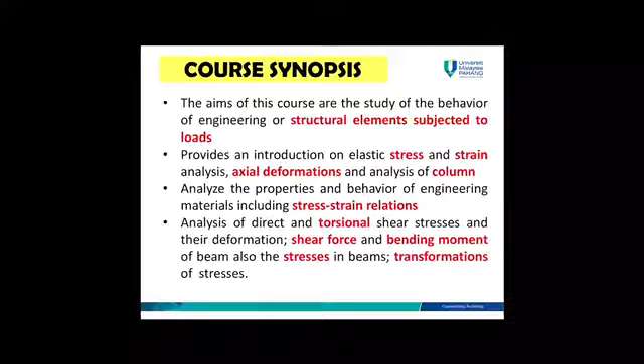There are 4 course outcomes of this subject. First is to apply the fundamental concept of stress and strain to axial load and transformation in plane. Second is analyze the shear moment diagram as well as bending and shear stresses in beams. Determine the stresses, deformation and twist angle of a torsional bar. Determine the magnitude of a critical load of a buckling column.

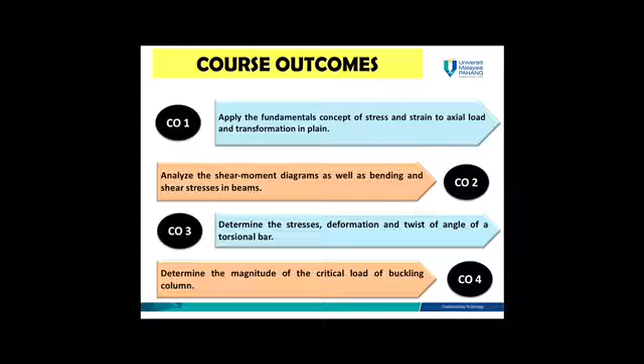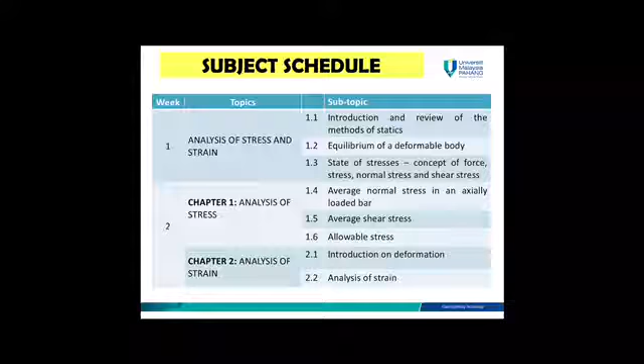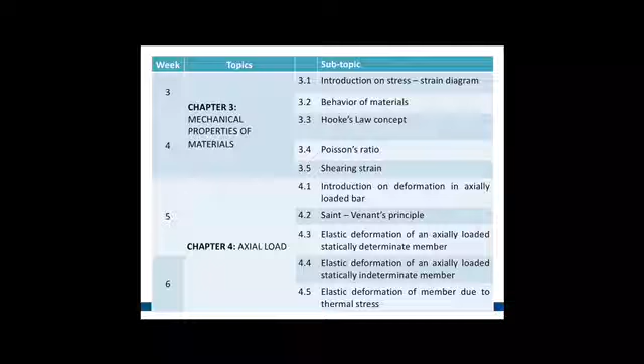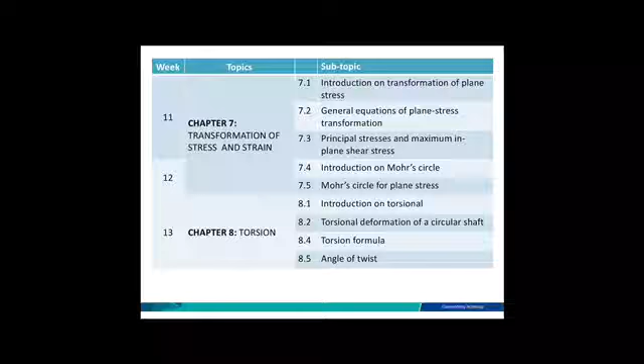This is the subject schedule. There are 9 chapters for mechanics of materials. First chapter is analysis of stress. Second is analysis of strain. Third chapter is mechanical properties of materials. Chapter 4 is axial load. Chapter 5 is analysis of beams for bending. Chapter 6 shearing stress in beam. Chapter 7 transformation of stress and strain. Chapter 8 torsion. Chapter 9, the last topic, will be analysis of column.

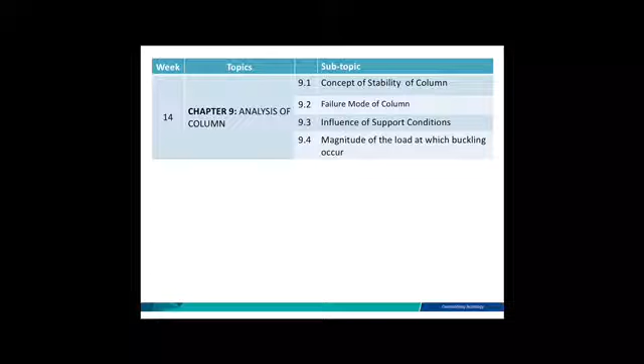Let's begin with chapter 1 of mechanics of material. Chapter 1 is analysis of stress. So why do we need to analyze the stress? We need to analyze the stress because what happens if you are in stress? If you are in stress, then you will depress. There are consequences when you are in stress.

Same goes for the structure. When the structures are in stress, they tend to deform. That's why chapter 1 is very important, because you need to determine the stress of the structure in order for the building or the structure to remain sustained without any collapse, without any deformation.

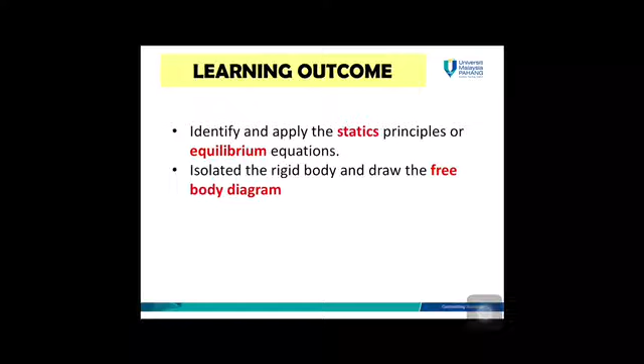As for introduction, mechanics of material is a study of the relationship between the external loads on a body and the intensity of the internal loads within the body. This subject also involves the deformations and stability of the body when subjected to external forces. Deformation means the action or process of changing in shape or distorting, especially through the application of pressure. As mentioned, mechanics of material studies the behavior of the material or structure when subjected to a load.

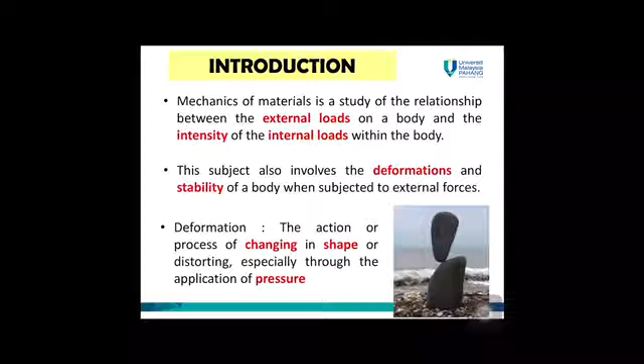So when the load is applied to the structure excessively, the structure will deform. Deformation here means changing its shape and dimension due to the applied load. All the structures you design need to be stable and in equilibrium condition. This is an example of what happens when stability or equilibrium is not taken into account.

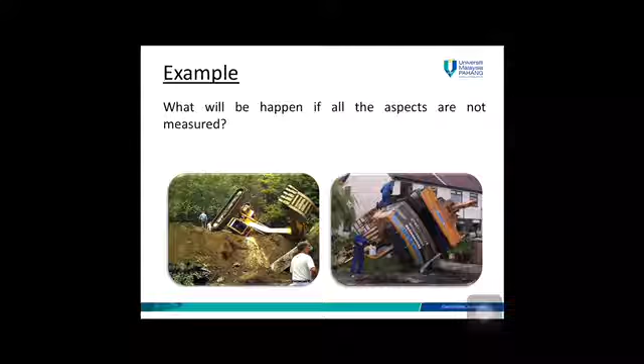The structure will collapse. As a civil engineer, one day you may design a building, so all aspects of equilibrium and stability need to be measured in your design in order to avoid a collapse.

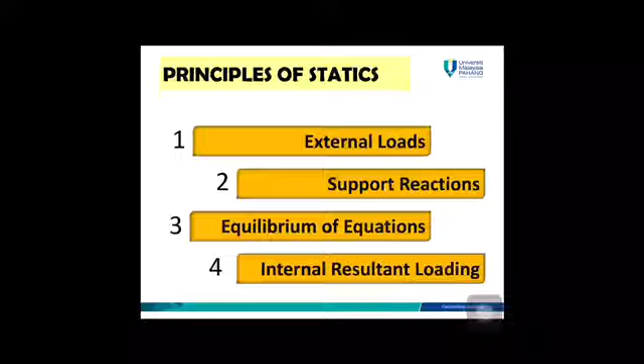First, we take a look at the statics principles. There are 4 static principles that all structures need to comply with. First is external load. Second is support reactions. Third is equilibrium equations. And the last one is the internal resultant loading.

So we take a look at the external forces first. What is the external force? The external force is the force. For example, this is your structure, and this is an element in the structure.

This element is subjected to all the forces, for example, surface forces. By definition, surface force is caused by direct contact with another body's surface. So this is your structure, and this is a force subjected from another element. The body force is basically the gravity of the element itself.

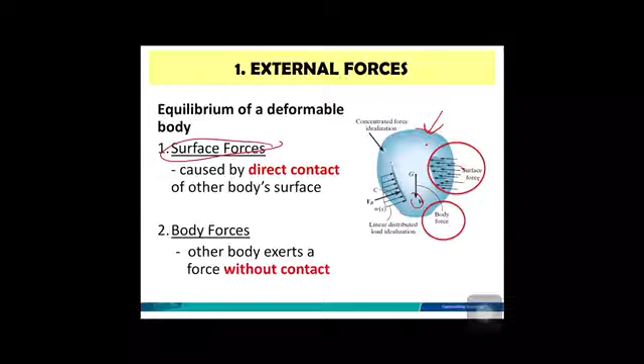So we take a look at the definition. Surface forces are usually caused by the direct contact of one body with the surface of another, the contact between two elements. In all cases, these forces are distributed over the area of contact between bodies.

How about concentrated forces? Concentrated forces act at a point, any load over a relatively small area compared with the size of the loaded member. A linear distribution load produces a resultant force having a magnitude equal to the area under the load diagram and having a location that passes through the centroid or geometric center of this area.

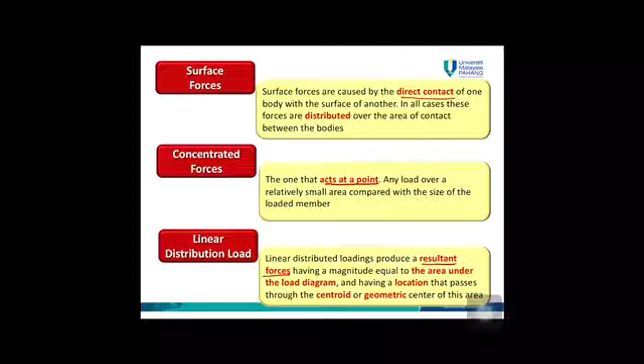So you already learned these types of loads in engineering mechanics. This type of load we will apply to the structure, and we will analyze whether the structure can sustain all this load or not. For example, you have a structure, a beam. There are different types of load: you have a surface load, a point load, and also a linear distributed load. What does it mean by all this load? In the next chapter, you will become familiar with all these types of load.

First, you have a UDL, uniform distributed load. This is a UDL, uniform distributed load. It is distributed equally on the surface of the structure. We call it a UDL.

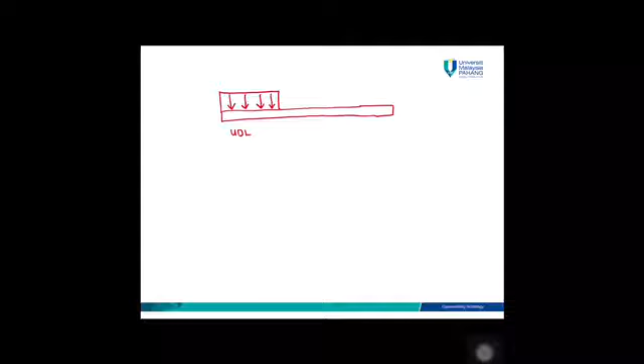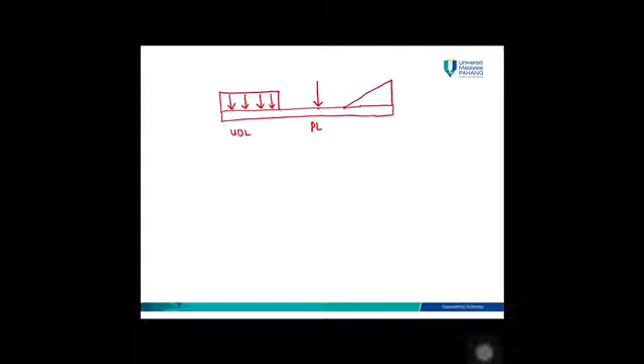Concentrated load, usually we call it a point load. Point load is only at a point, only at this point. Linear distributed load has a different magnitude, usually in a triangle or trapezoid shape. The magnitude varies from 0 to the maximum magnitude. This one we call a linear distributed load.

Linear distributed load has a different magnitude. I repeat again: here is 0, here is the maximum magnitude. This is the type of load that we will analyze later.

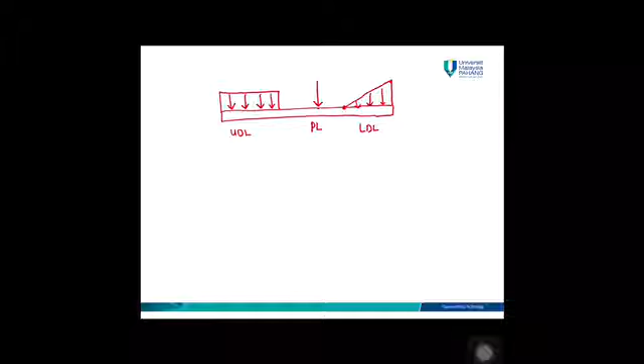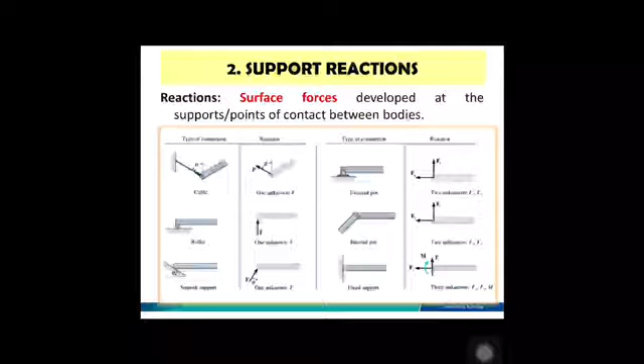And then we go to the second principle, which is support reactions. Usually we have 3 common supports used in mechanics of material: roller, pin, and fixed. It will be located anywhere along the structure elements, depending on the design and the application of the structure.

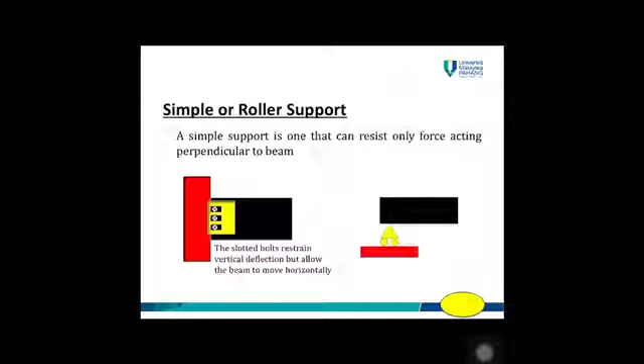For example, a roller: this is your beam, and this one will be your support. For a roller, they only have one support reaction, depending on the position of that support. So this one I name as AY because it is in the Y direction, and I assume this is point A. You can also have different names, like RA or HA, depending on the axis.

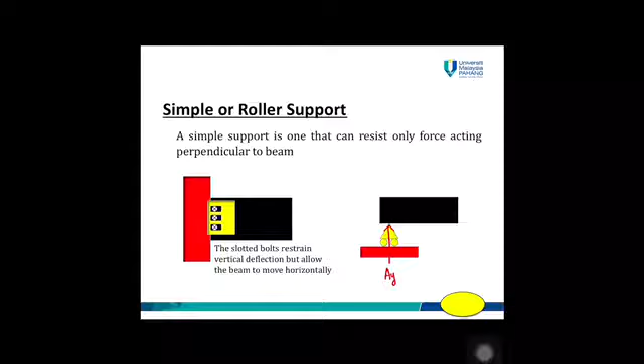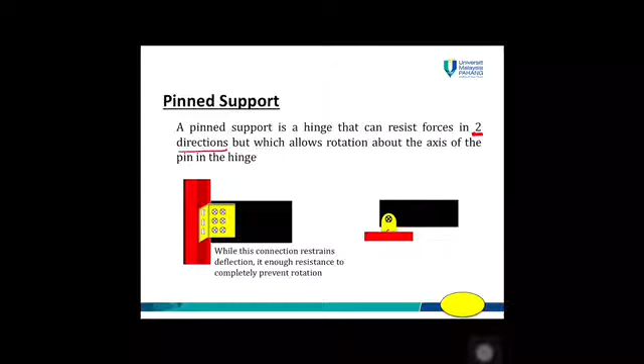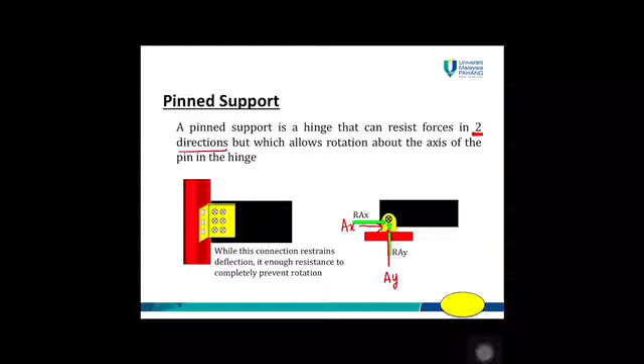Second support is a pin support. Pin support has 2 support reactions, in the Y axis and also the X axis. I name it AX and AY. You can also name it R, meaning reactions. The last one is a fixed support.

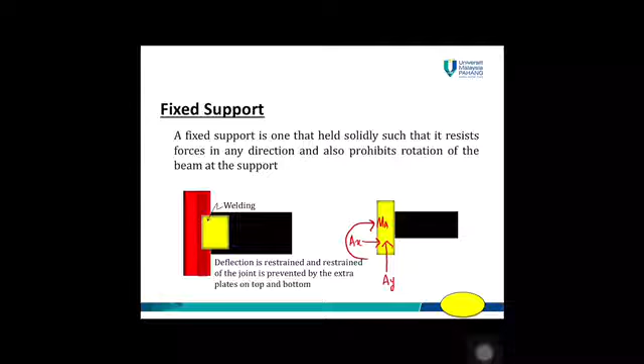Fixed support has 3 support reactions: in the Y direction, AY, in the X direction, AX, and also a moment, which I name MA. How do I know AY is upwards and AX is to the right? I assume. You can assume all these support reactions, and if you get a negative value, it means the reaction is contrary to your assumption.

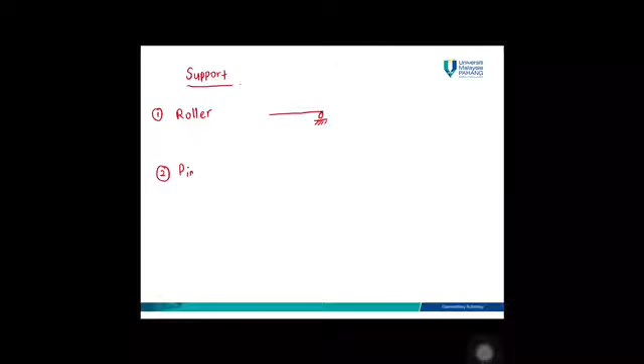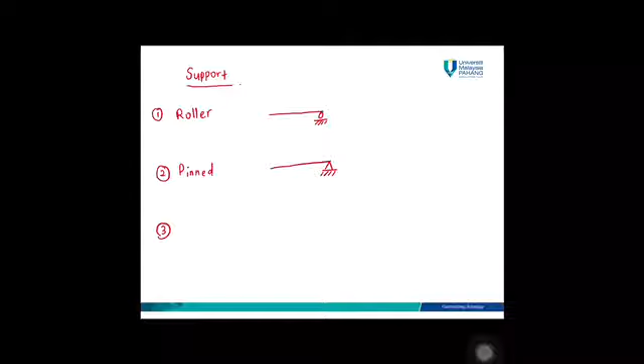Remember that you have 3 supports. First, you have a roller - for example, this is your beam and this is your roller. Second, you have a pin connection - this is your beam and this is your pin. Third is a fixed connection - this is your beam.

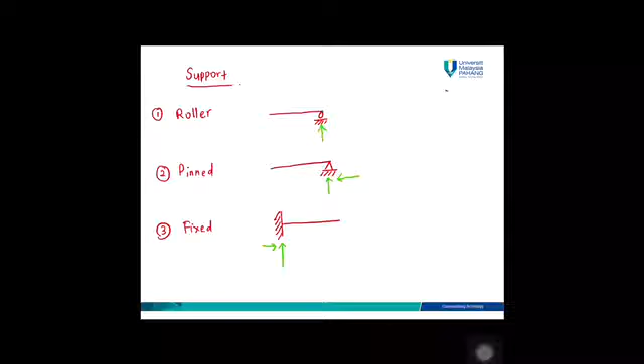For a roller, you have 1 support reaction in the Y direction because the position of your roller is in Y. Second, for a pin, you have 2 support reactions in the X and Y directions. For fixed, you have 3 support reactions: X, Y, and also a moment. All the directions, we assume.

We assume first, but when you analyze, you assume and then you analyze. If you get a positive value, it means it's okay. But if you get a negative value, it means the direction is opposite to your assumption.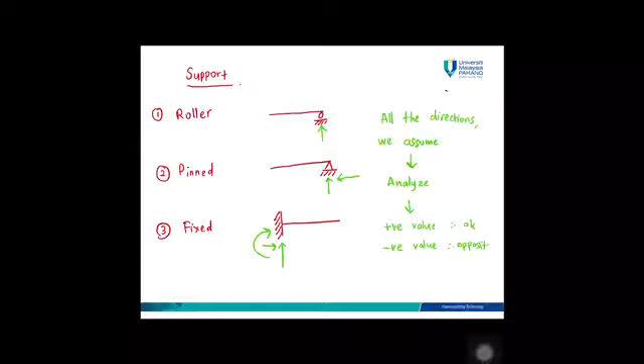Now we go to the third principle, which is the equilibrium of a deformable body. The equilibrium of a body requires a balance of forces and a balance of moments. As I mentioned, all structures need to be in a stable state. How do we ensure that the structure is stable? By applying the equilibrium equations.

As you've learned in engineering mechanics, you have equilibrium equations: summation Fy equal to 0, summation Fx equal to 0, and summation moment equal to 0. The total force in the Y direction should be 0, the total force in the X direction should be 0, and the total moment of the structure needs to be 0. So when all the equilibrium equations are complied with, then you can say that the structure is stable or in an equilibrium state. So the best way to account for these forces is by drawing the free body diagrams.

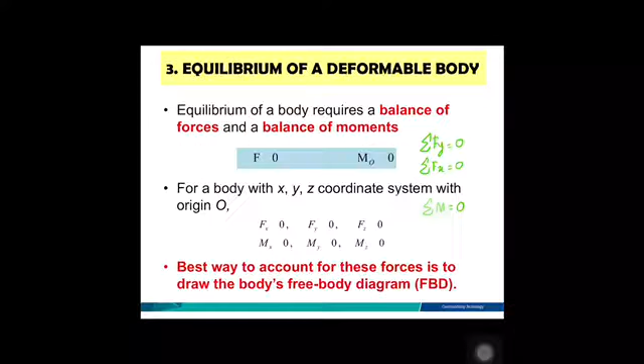The last static principle is the internal resultant loadings. The internal resultant force is to hold the structure together when the body is subjected to external loads. External load is load we apply to the structure, but internal load is the inside force or inside stress that counters back the external load applied to the structure. The function of internal force is to hold the structure together when you apply external loads.

The objective of the free body diagram is to determine the resultant force and moment acting within a body. In general, there are 4 general types of resultant loadings: normal force, shear force, torsional moment or torque, and bending moment. Torque you will learn in chapter 8. In chapter 1, I will focus on normal force, shear force, and bending moment.

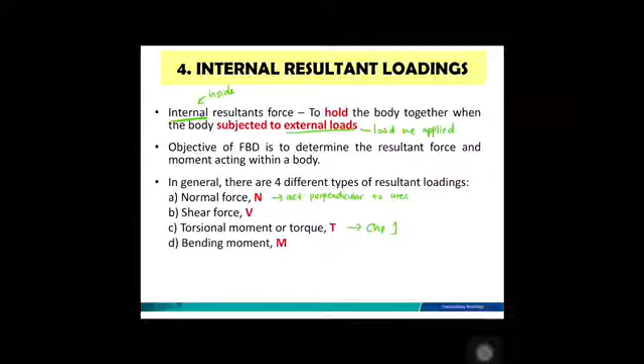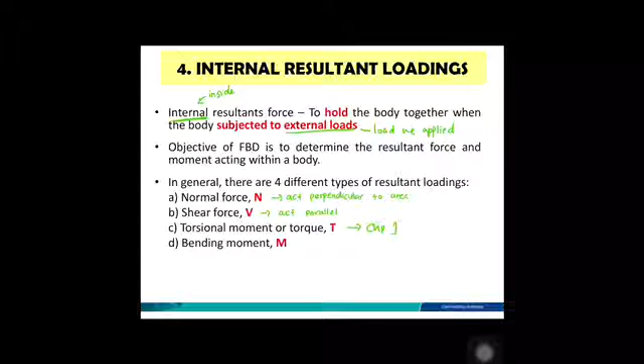Normal force acts perpendicular to the area, while shear force acts parallel to the area, and bending moment is a rotation. Let's look at the definition of each. If this is your element and this is the area to analyze, this is your normal force acting perpendicular to the area, this is your shear force acting parallel to this area, and this is your moment. This is your torsional moment, which you will learn in chapter 8.

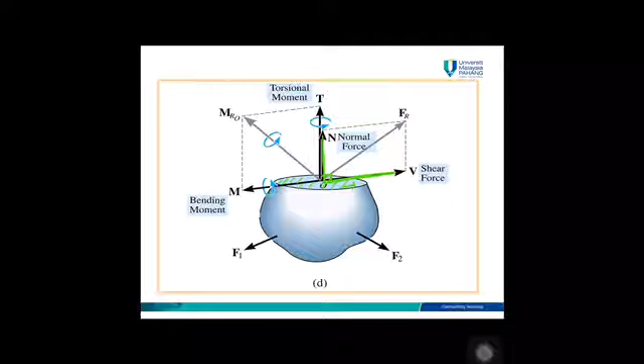The shear force lies in the plane of the area. It is developed when the external loads tend to cause the two segments of the body to slide over one another. This is your area and it acts parallel. It depends on the type of failure of your structure.

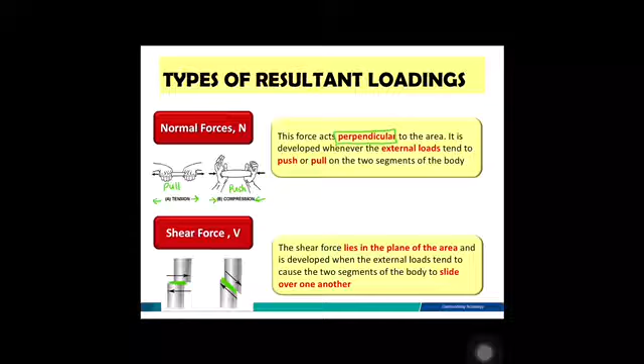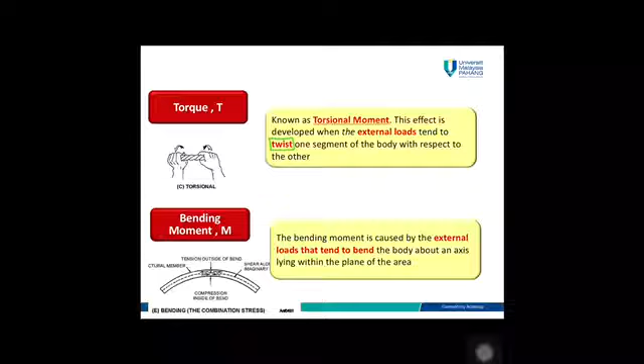The torsional moment we know as when it is twisted, like when you spin your clothes after washing them. So there's some torsional moment when you twist. The bending moment is caused by external load that tends to bend. For example, this is your beam, and it will bend when the load is excessive.

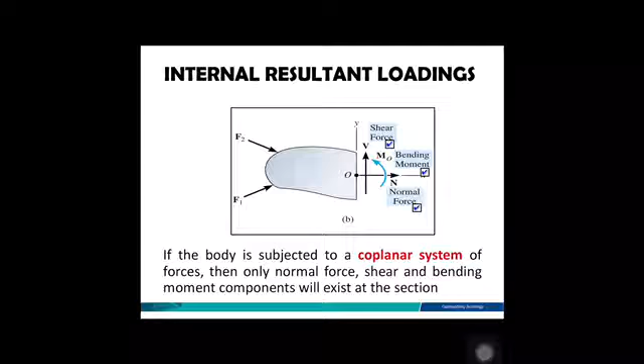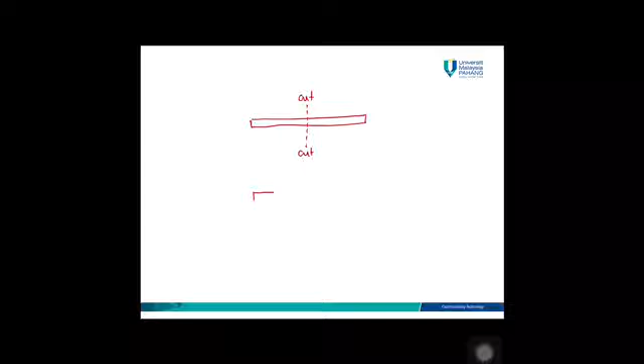This is an explanation of the direction of the internal resultant loadings. This is your element: normal force, shear force, and bending moment. For example, this is your beam, then you cut here. For example, this is point A, this is point B.

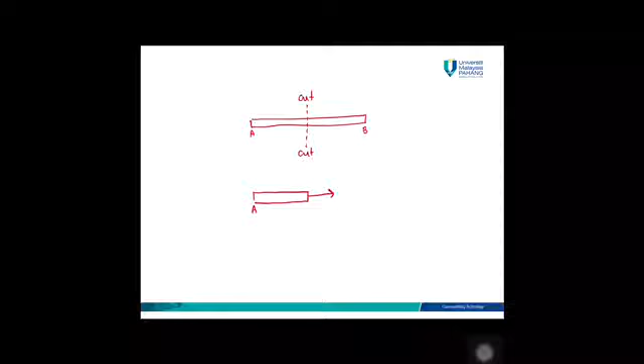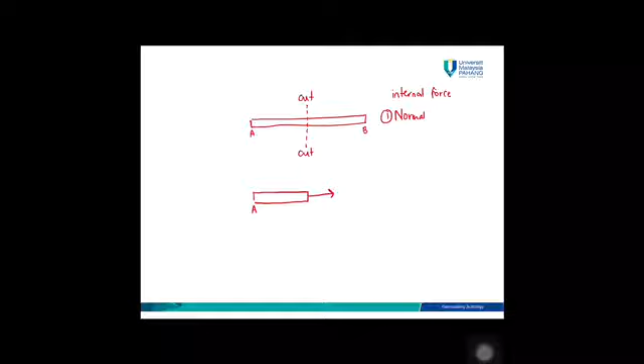When you cut at A, you will expose all the internal forces. So internal forces, remember internal forces or internal resultant loading: you have normal force, shear force, and also bending moment.

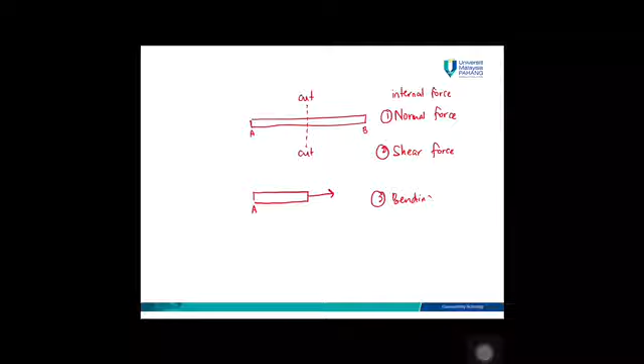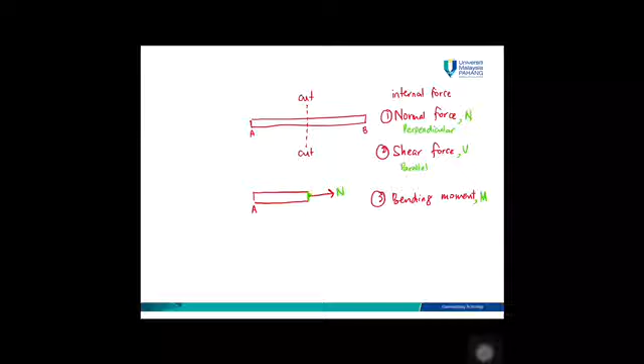Normal force, the symbol is N, acting perpendicular to the area. Shear force, the symbol is V, is acting parallel. And the bending moment is a rotation, symbol M. This is the place where you cut here, and then you expose its normal force acting perpendicular, shear force acting parallel, and also a bending moment.

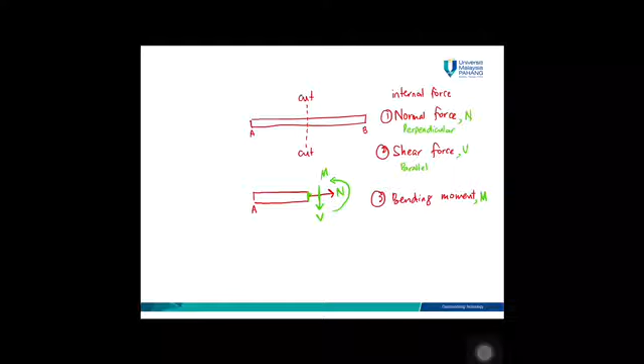There is a procedure for you to analyze the structure. First is to determine the support reaction. Remember, you have three support conditions: roller, pin, and fix. Each of these supports has their own support reactions. For example, roller has only one support reaction, pin has two support reactions, and fix has three support reactions.

First, you have to calculate the support reaction value by applying the equilibrium equation. You have three equilibrium equations: summation Fy equal to 0, summation Fx equal to 0, and summation moment equal to 0.

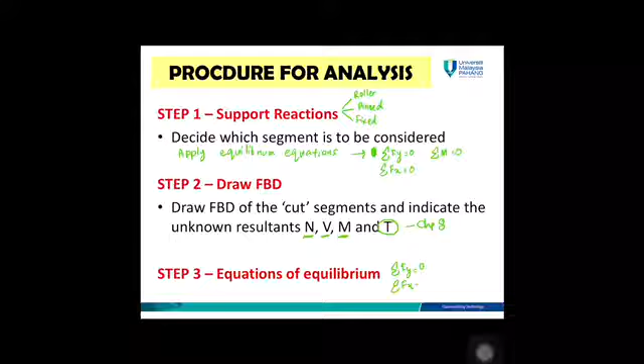After you get the support reaction, you draw the free body diagram to expose all the internal forces. You have three internal forces: normal force, shear force, and bending moment. Torsion you will learn in chapter 8. The last step, in order to calculate the internal forces value, you need to apply the equilibrium equation again: summation Fy equal to 0, summation Fx equal to 0, and summation moment equal to 0.

But if you start from B, normal force should be to the left, your shear force should be upwards, and moment will be clockwise. Make sure you did not change this sign convention for internal resultant forces. Please follow this sign convention for your analysis.